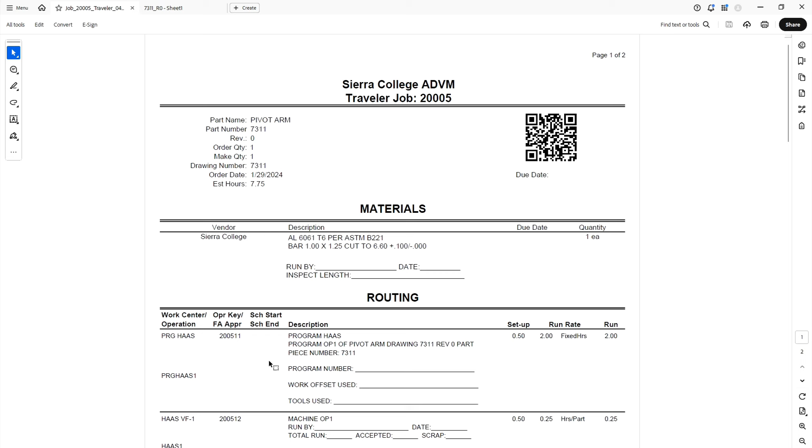So when you go back to the school, these programming operations for each step would only be done the first time you run the part. After that, that traveler or routing would be modified to remove the programming operation. So in that process, you usually have someone on an administrative level that is doing those changes, but you need to put the program number, your work offset used, and the tool numbers you used, not necessarily the sizes.

That'll be called out on your setup sheet, and that way that information can be rolled into notes that go into, see how this is Haas VF1 machine op 1. The details that you put in there could be added as a note for the operator who's going to come back and run your parts in the future. So it's important that you do the documentation well, because the program's only as good as the setup information that someone else would use to set up your part. So ideally you would have instructions that are good enough that you don't have to be here.

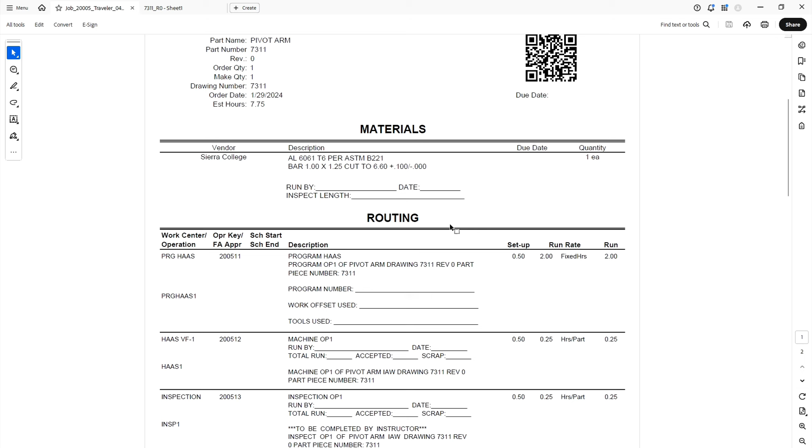We also need to reference this for the material we're using. So the material that was ordered is this bar size. So that's what we need to set up Fusion. It's a 1 inch by 1 1/4, and it's cut to 6.6 long, plus 100 thousandths minus 0. So we're going to set up our stock. Our ideal stock size needs to match this configuration here. Okay. So that may be out of your control to decide, depending on the level of control the company you work for has.

Okay, so we also want to reference the drawing on how we're setting up our datums. If we look at this, this drawing doesn't have GD&T, but there's still an implied datum here. If you look at where the dimensions radiate or reference from, you have these length dimensions that are referencing the right side of the part. So we know this flat on the right side is one of our datums. And then we have an overall width, and then we have a dimension that defines that it's equally split or centered. So that makes this bottom edge another implied datum, because that's where most of the dimensions are coming from.

Our dimensions on the right, this says 2 times for both sides. It's somewhat implied that that is centered over center line. So that width is not that critical, but our center line is dimensioned at half the width of our block. So we want to set this up so that we're referencing our fixture against the same references that the dimensions call our tolerances, to try to make the part as close as we can and not be fighting our own fixturing.

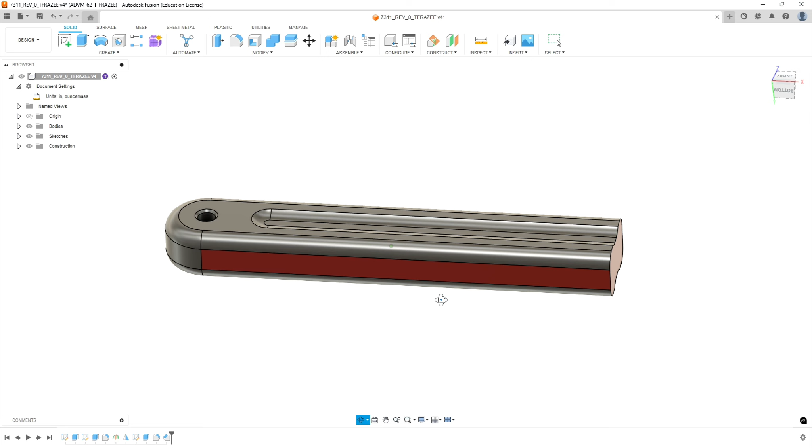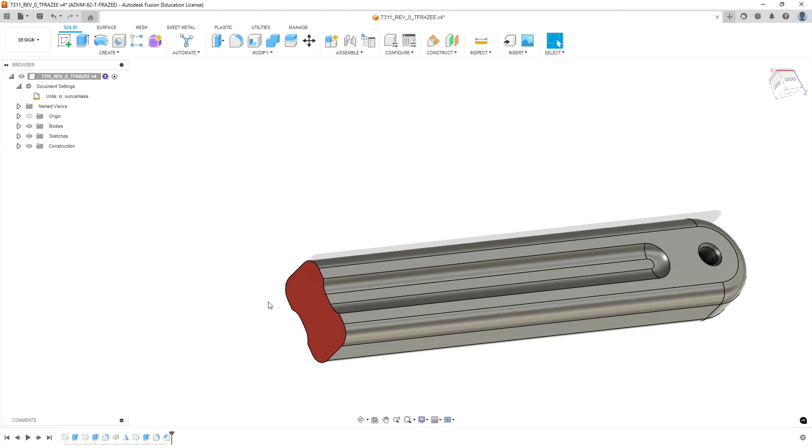Okay, so let's go look at our model. Here's our Fusion model, and I have colored the surfaces in my model that correspond with the drawing datums I just discussed. You don't necessarily have to do that. We're just developing our plan of attack here. So when we fixture our part, we want fixture contact on both of these red zones, at least for our first operation. Okay, and ideally you want to keep track of those.

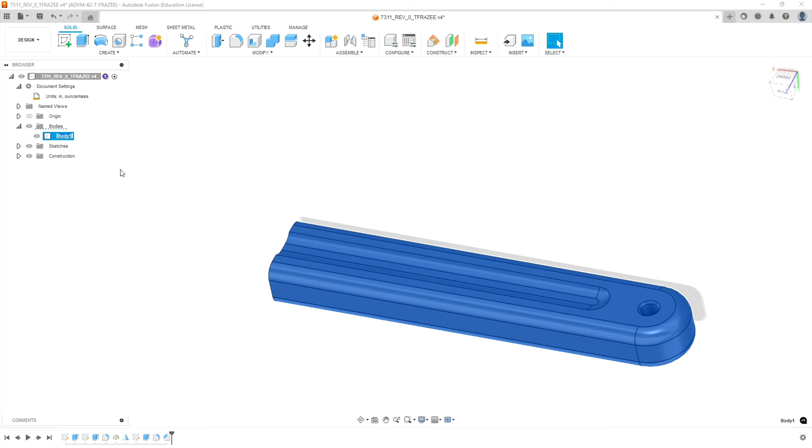So here we go. First, we're going to define our stock. There's a bunch of different ways to do this. We're doing some 3D machining. I'm going to go ahead and do a little bit longer process where we're actually going to define a body for the stock. So we're going to create a second body. Before we do that, let's name the body we currently have by expanding bodies, and let's name this the part number 7311. Enter. That way it's clear that that is the part, and if we make other bodies for stock, we're going to label them accordingly.

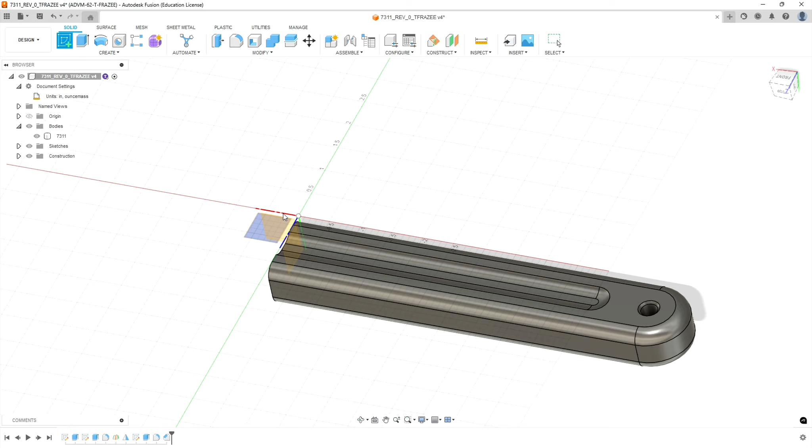Okay, so first thing, we're going to go to sketch, and we'll go ahead and sketch our stock in the same plane that we used as primary for our primary view. So in this case, it's what was the front view. And then we're going to just draw a rectangle around our part. Again, there's a multitude of ways you can approach this.

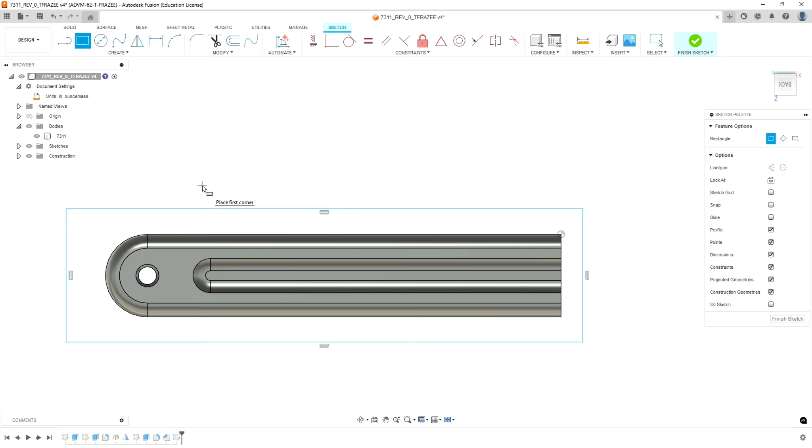All right, so now let's look at what size was our stock on our traveler. Okay, the stock size that the planner's designed around was 1 inch bar by 1 1/4 by 6.6 long. So this 1 1/4 is the height of our rectangle, and the 6.6, or 6 inches and 600 thousandths, is going to be our length. So let's measure the length.

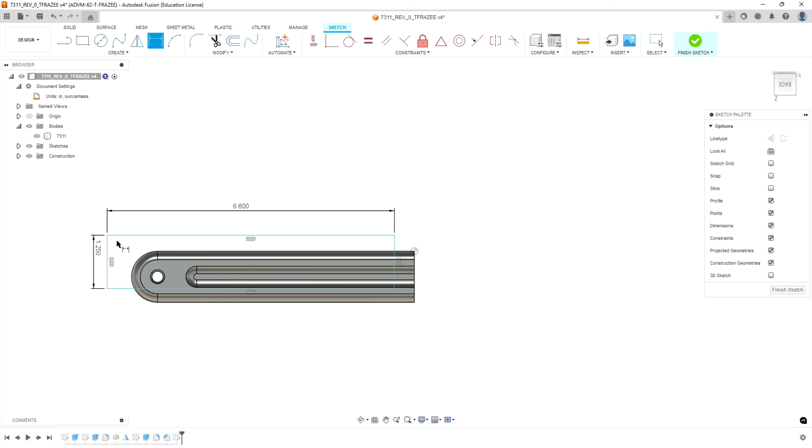Okay, 6.6, and our height is 1.25. And that should give us at least a rectangle that's the correct size for our part. Now we need to center around this volume here. I'm going to draw a line from corner to corner on the box. That's an easy way to find center with one entity.

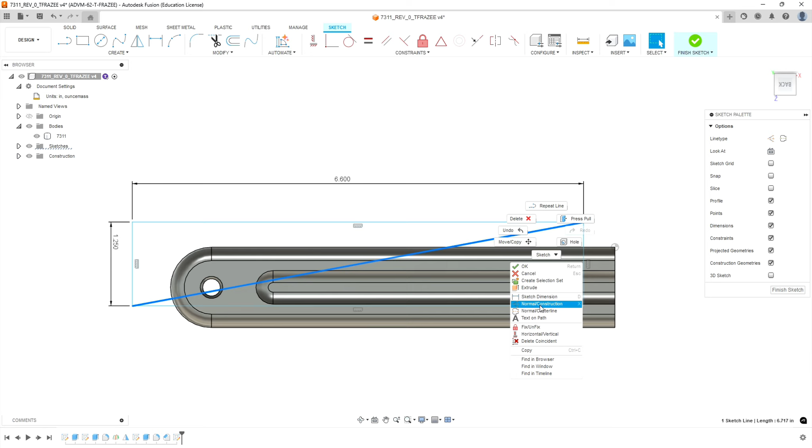And we're going to change that to construction. And then we need to find center on this space here. So if we take another line, and let's just draw this. The smart snap doesn't always work on silhouettes, but we're going to pick the right side of our part, and then we're going to extend that and go past the radius on the left. Click. Then we hit escape, and we should have a horizontal relationship on this part.

If you don't, you need to add it just like that. It gave me an error because I already had it. And then we're going to go to construction line on that feature as well. And we got an association. We want to make an association with the right side and the midpoint of the right edge.

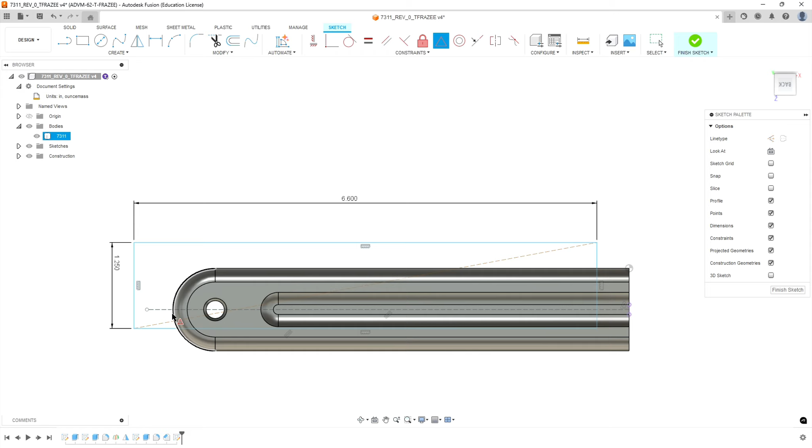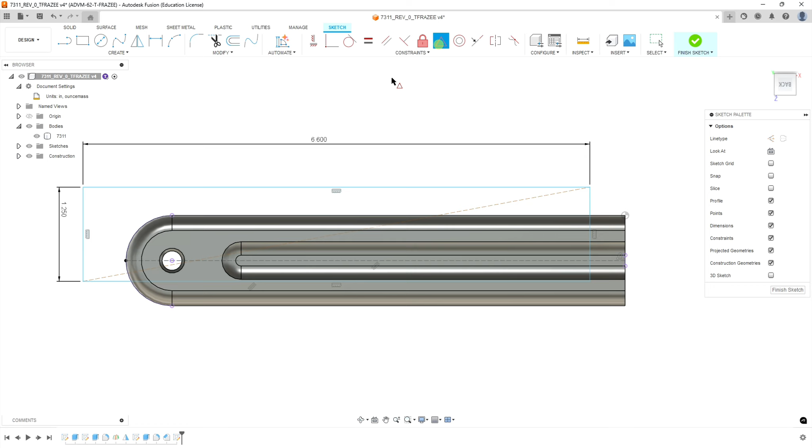Okay, and that'll center our center line, and then hit escape, and we're going to drag the other endpoint. We're going to highlight it, and we're going to make it coincident with the radius of the silhouette. This horizontal line I just created is centered on our stock or our model and centered on the volume of it. Now we simply need to create a relationship between the centers of both center lines, and we will have centered our stock evenly around this shape.

Okay, so we've now established the boundary, and now I'm going to hit Finish Sketch. At this point, I'm going to look at it in a 3D view. For our first operation, we want to use as much material as possible. We're going to leave as much as possible to hold it in the vise. Our part should be nominally 3/4 of an inch, and we have an inch to work with.

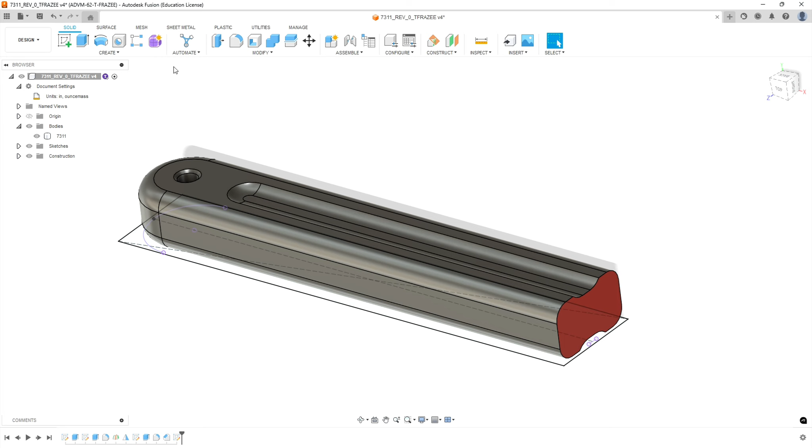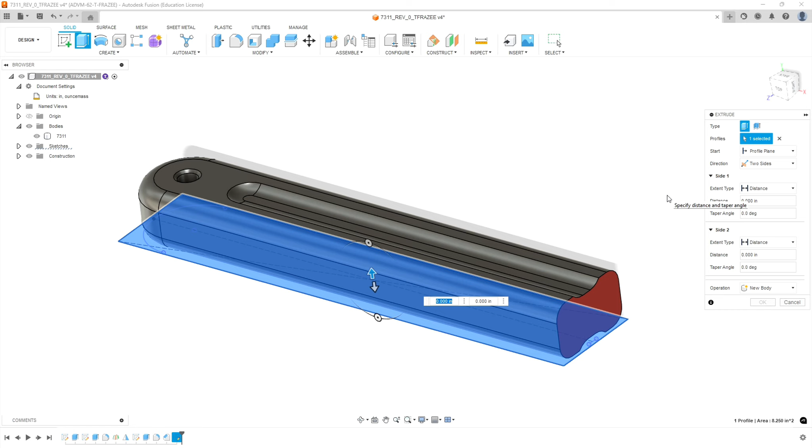So we're going to do an extrude, but we're going to do it in both directions. So we're going to go 2 sides, and in the first direction, if your arrow is pointed up, your arrows might default to a different direction, but in the one direction, we want to go just slightly over 3/4 of an inch because that's how thick our part is. So let's go 0.75, and let's add 30 thousandths, so we'll make that 0.78.

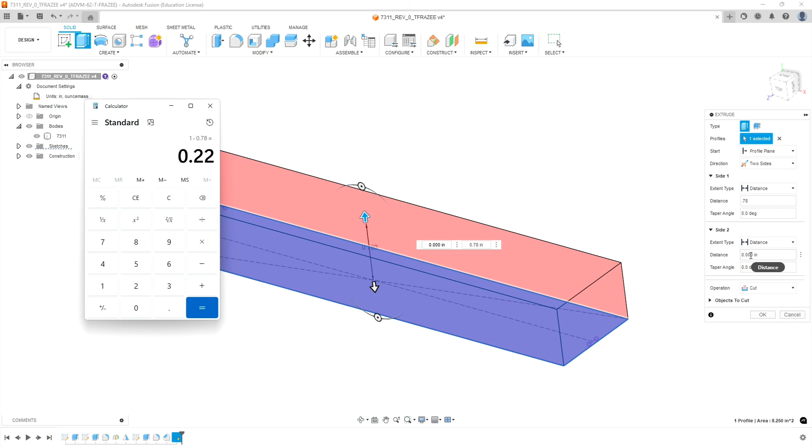Okay. Now our opposite direction is going to add up to an inch. So if I take my calculator and I take 1 minus 0.78, that gives us 220 thousandths. So that's what we're going to go in our opposite direction, 0.22. Okay, now right now it's defaulting to a cut. It's seeing that there's a body there. It thinks it needs to remove material. That's not what we want to do.

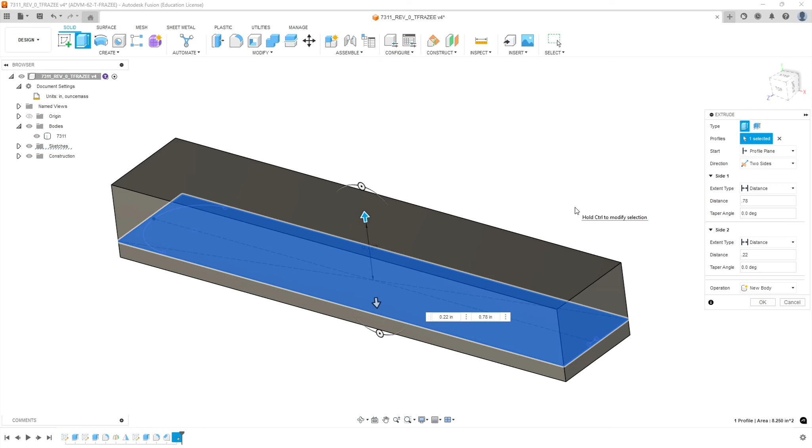We want to create a new body. Okay, and now it should turn gray. This will also make it a separate entity from our model. So we'll have it listed over here on the left as a separate body. We're going to hit OK. And now I can't see my part. So we're going to go over here. We're going to rename this body stock.

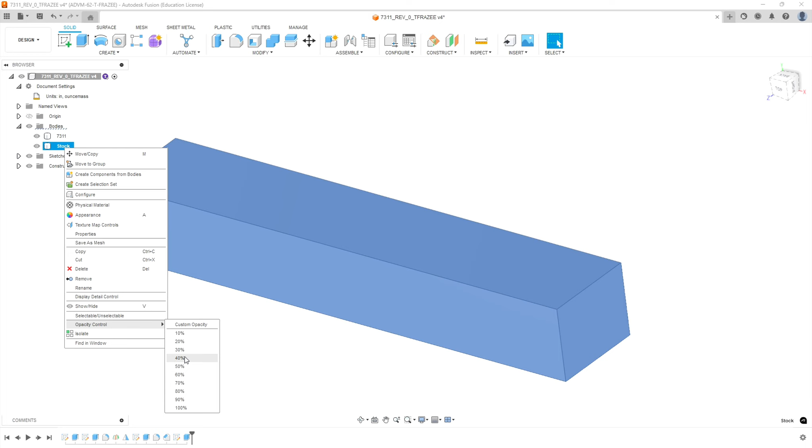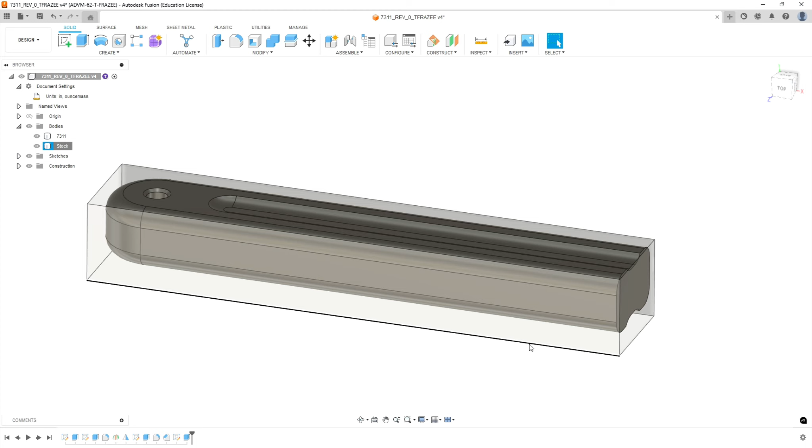Okay, and then we're going to right click on the stock, pick opacity control, and go to 50%, and that will make our stock transparent so we'll be able to see that our model is still embedded in there. You've created the stock. Our first operation should be pretty similar to other things you've done. We should have 30 thousandths of material to skim off one side, and then we will hold on to the larger portion. And if we use our tallest parallels, we should have plenty of space.

However, first operation like this, we're going to bring in a vise. I do want to note that this semester, in the spring of 2025, there initially was a different version of this vise attached to the assignment. At the time this video is posted, that has been updated. But if you downloaded a different version of the vise for former projects, you want to make sure that it has 2025 in the name.

The reason is I've added configurations for each parallel height that we have in stock. Now for this first operation, we can use the tallest ones, which are the 1 5/8" parallels. We try to use those whenever possible. It gives a minimum grip and maximum amount of material sticking out. So our first vise we're going to import for our first setup is going to be that configuration.

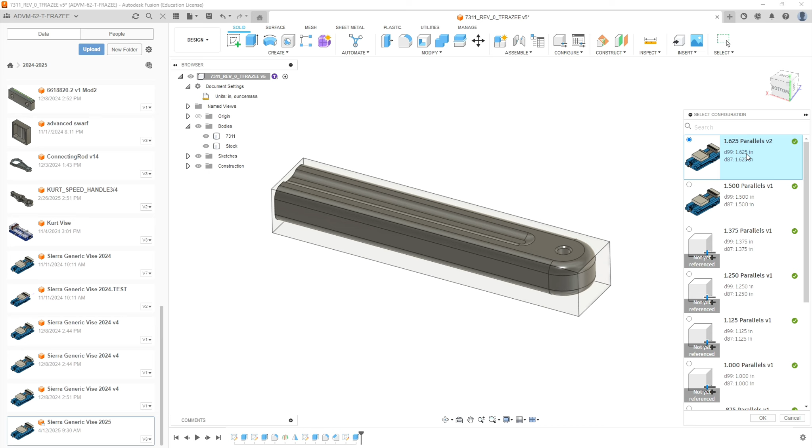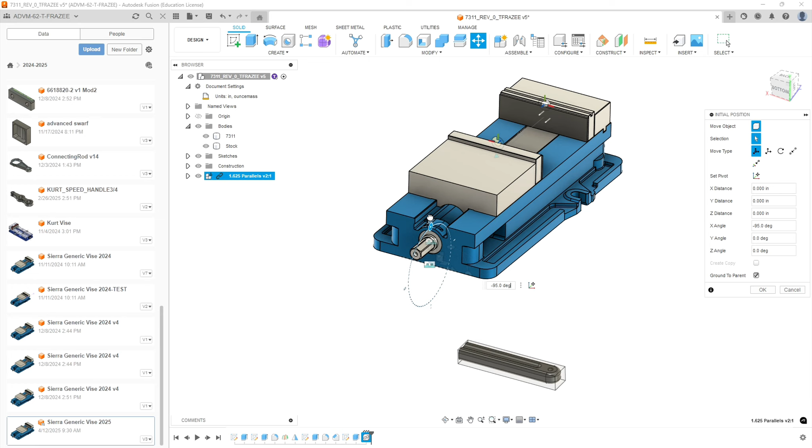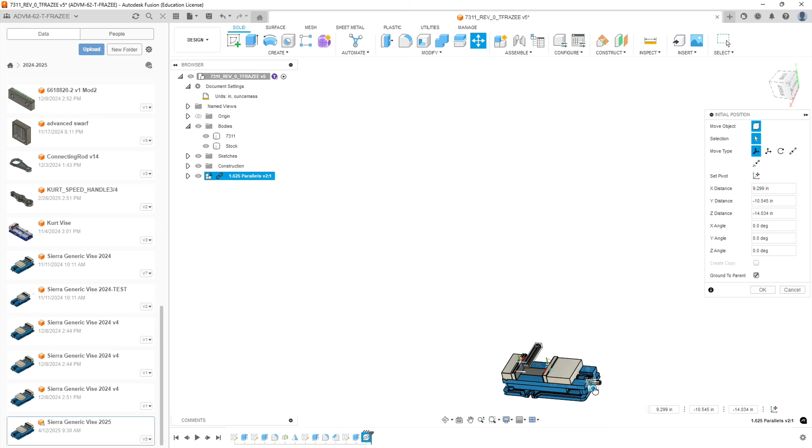Let's hit OK. And we're going to move our vise around so that it's matching the view of how we want to machine our first operation. So I'm going to flip this 180, and flip it down to 90, and then we're going to use joints to put this together. Although I do like to start with the vise position somewhat closer to where it's going to be in orientation, so we'll put it below it, and at least we're starting out somewhat close. Okay.

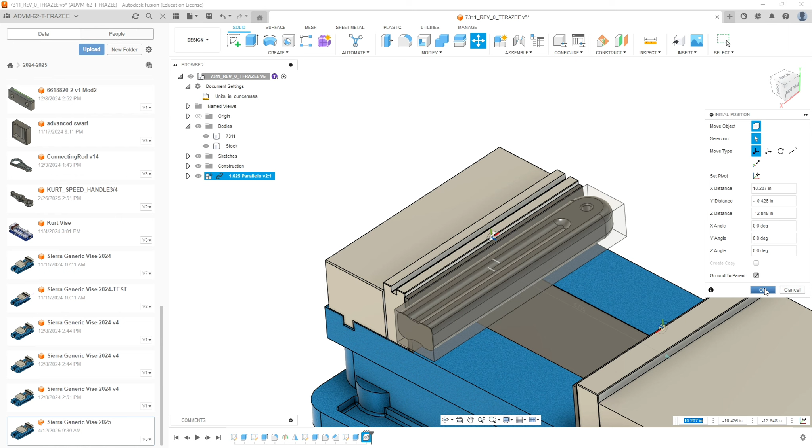We're going to do this planning for each setup before we get into CAM, because every time you come in and out of design mode in CAM, you have to regenerate your toolpath. We don't want to do that. Alright, so we're going to hit OK. We're just going to accept that as its display state at the moment.

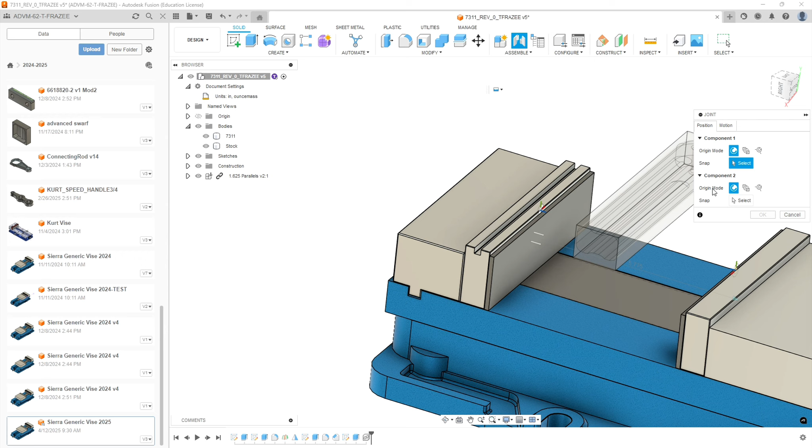Now we're going to position our material in reference to the fixed jaw of the vise. Okay, so we're going to use a joint for that. And we should be able to achieve this using the default settings, picking the front corner of the parallel, and we want the origin target to be horizontal when we do this.

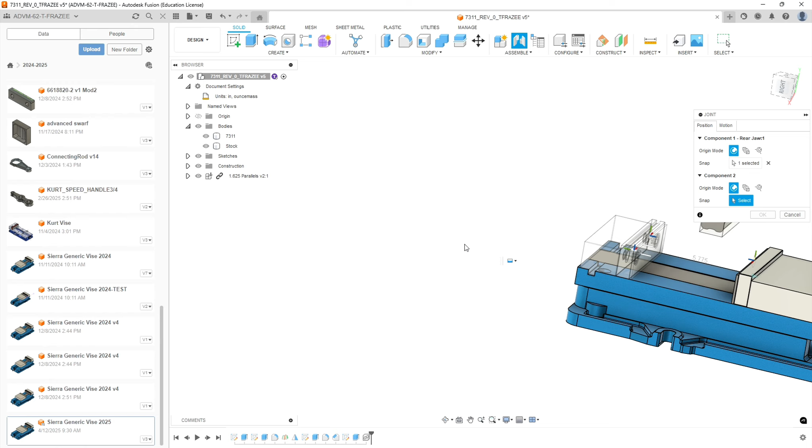Okay, so we're going to select right here, and then our second component, which is the model, it's going to be this bottom left corner. And you want your target also to be horizontal. Now we might have to flip the orientation of it, but we're going to pick that.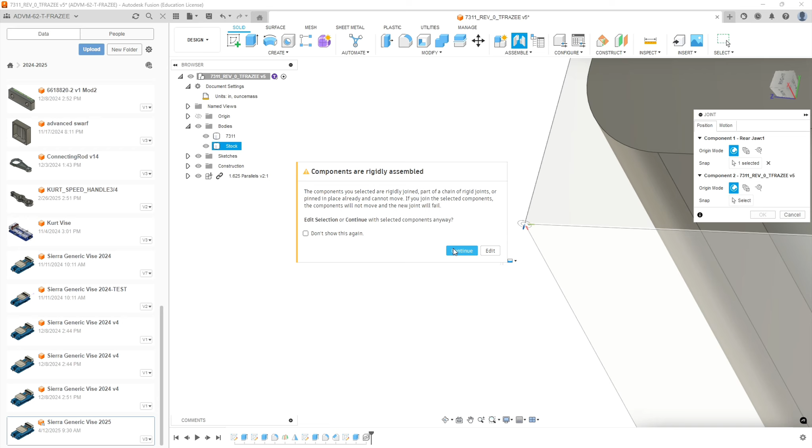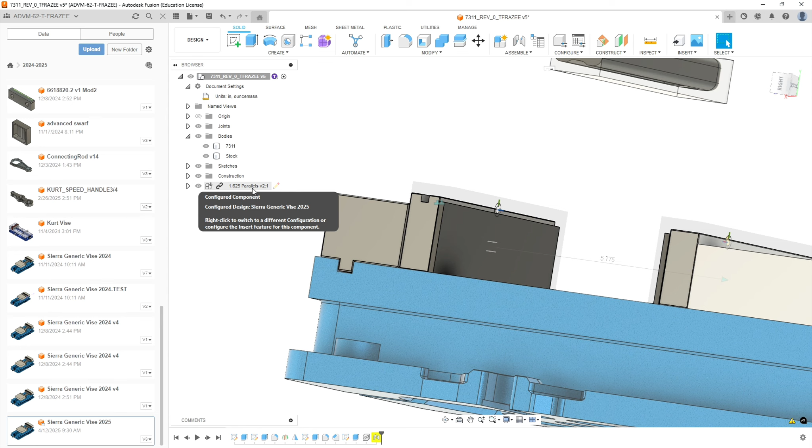If you get this error, it is because our components are fixed in place and we need to float one of them. So we hit OK, and it failed. Okay, so what we need to do is make sure that we right click on this component and we unground this from parent. Okay, and so it will now allow that joint to go into the correct place. So get rid of that error. Your default settings might be different, so you might not have to do that.

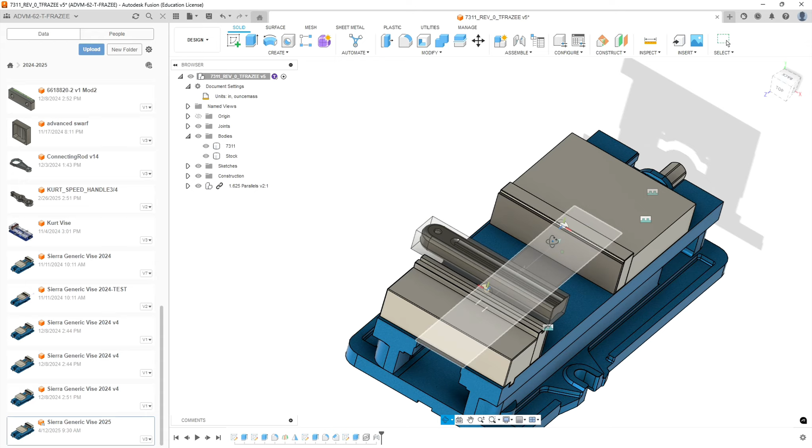Okay, so now we've established that this is where the vise is. This is where our part origin is going to be. When we machine this operation, it's going to be at least the back left corner. There's different philosophies on whether to set your origin on the top of the material or the top of the parallel. We'll address that when we get into the CAM of this.

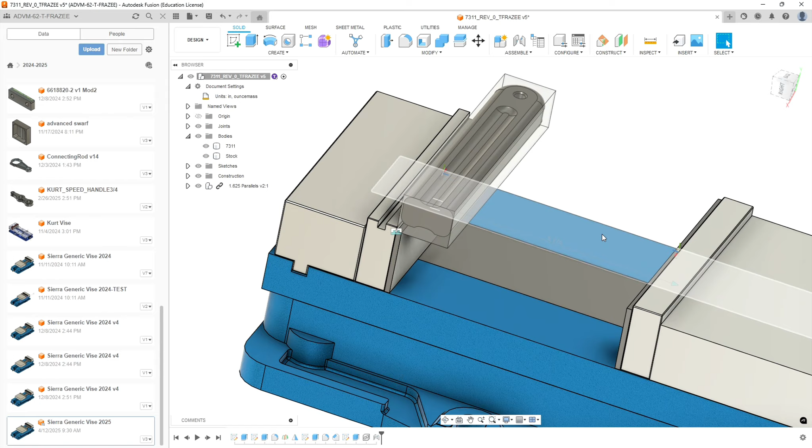All right, and then we have our vise spacing, which it's somewhat semantics unless you're using collision detection, but we're going to set this width here we have here so that the back jaw lines up with this. Now you can achieve it with a joint. It just this in some ways is more flexible.

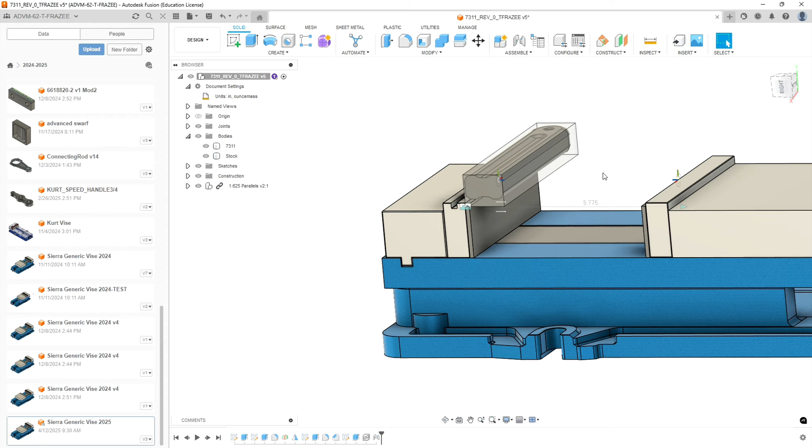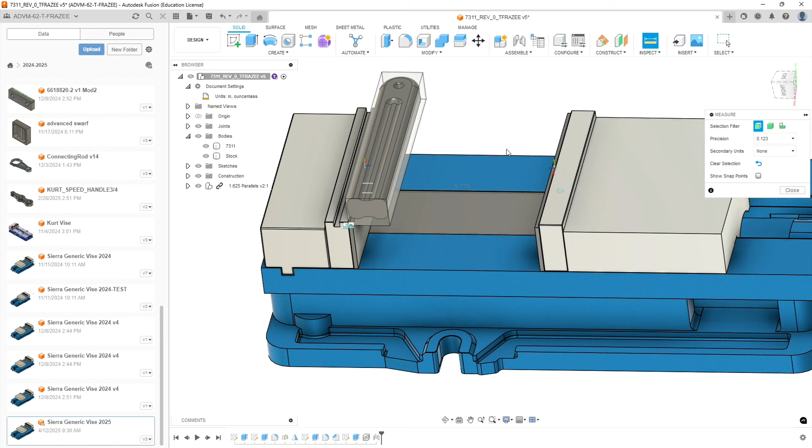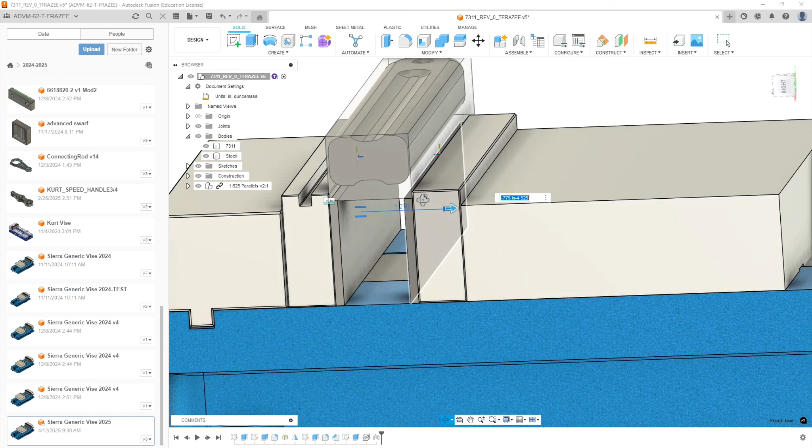So our measurement is coming from. So we're gonna go to inspect, and we'll measure from our stock to the face of the back jaw, and we currently have a distance of 4.625. We're going to take that number and we're going to adjust the spacing by subtracting that difference, and it should close up to the right distance. Okay, so there's our first operation.

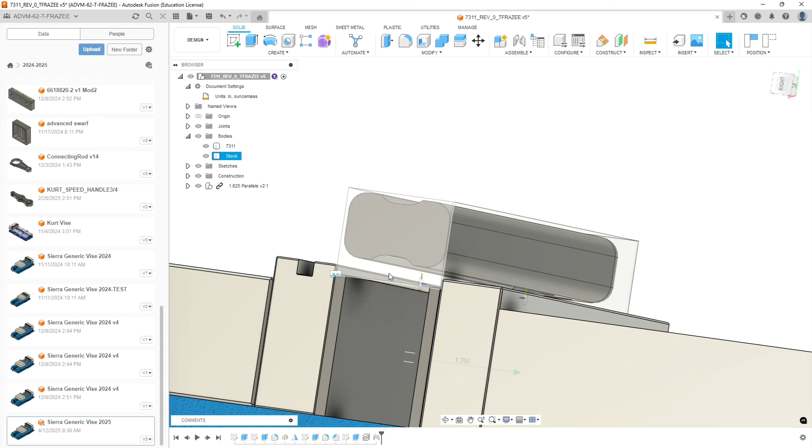Now our second, so we're going to set this up. Our left side is going to be our stock. If we're savvy about how we set up our vise stop, we can put it in a place where we don't have to change our origin. We would hit somewhere down here in the bottom so that when we flip the part, we're not going to have any of these cutters run into it.

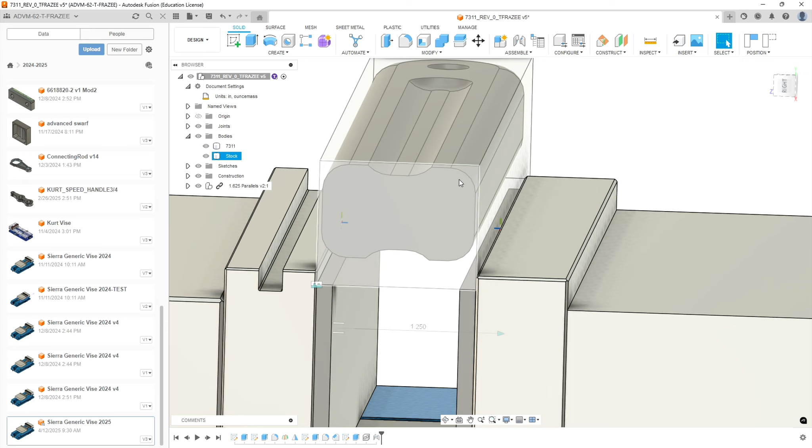But for the second side, we can't use the same height parallels, because of the difference between this fillet and the top edge of the part, which will be machined down to that. So if we look at our drawing, we have what size radius? We have a 200 thousandths radius there. So our parallels, we want to grab this flat here we have in the side view, but we need to leave enough room for the ball cutter to roll around and come past tangency to machine that 200 thousandths.

So what we need to do is grab on just as little of this flat here as we can. So we may need to play with the configurations of our parallels to get the right amount.

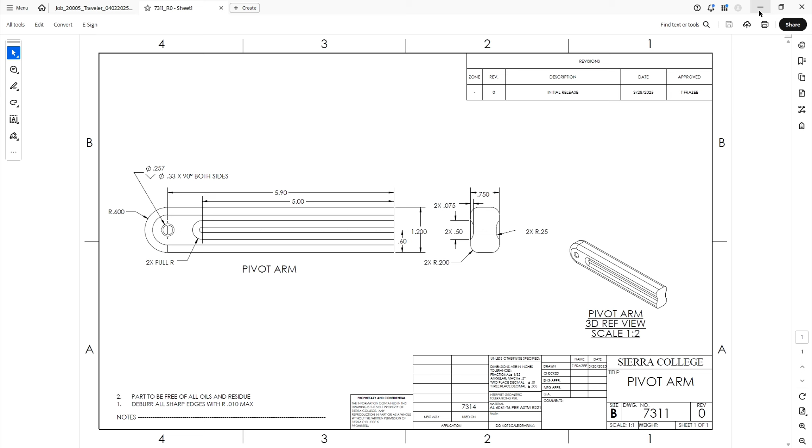Okay, so for our second instance of the vise, we're going to hide the first instance of the vise. Okay, so now we're going to bring in a second instance of our vise. Drag in our vise. It's going to ask you which configuration parallels do you want to use.

With the 1 5/8 parallels, we're only holding on to approximately 80 to 90 thousandths. So we need to hold on. We know we need to hold on to at least 250 thousandths. So we can guess and then we can adjust. But let's start with the 1 1/4 parallels. And we can always adjust later in the configuration.

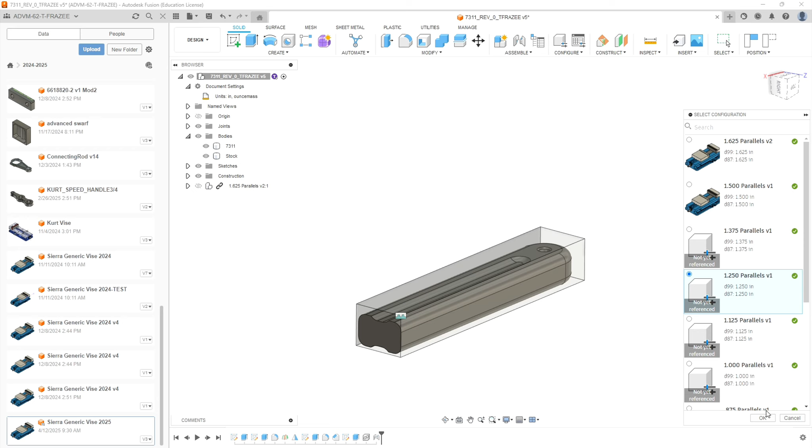Okay, so we're going to bring in the version with its 1.25 inch parallels, and we'll make our decision once we have this assembled. Okay, so we want to rotate this so that it's in a rough orientation of how it's going to hold a part. So 180 degrees in one axis and 90 in the other. Let's get it lined up.